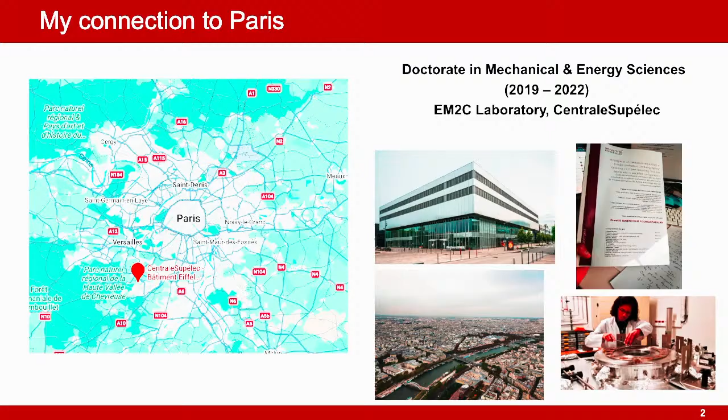Now coming back to thermoacoustic instability—what is a thermoacoustic instability? From the name we can see there is something to do with acoustics, and thermo, so something to do with heat. I'm going to play a video here, which was taken by one of my PhD supervisors, Dr. Daniel Durox.

Let's see if it works. So what you see here is sort of like an organ pipe, but a flame organ pipe. There are tubes of different heights that you can see here, and then there is a very small burner with a tiny flame that we are going to introduce into each of these tubes, and let's see what happens.

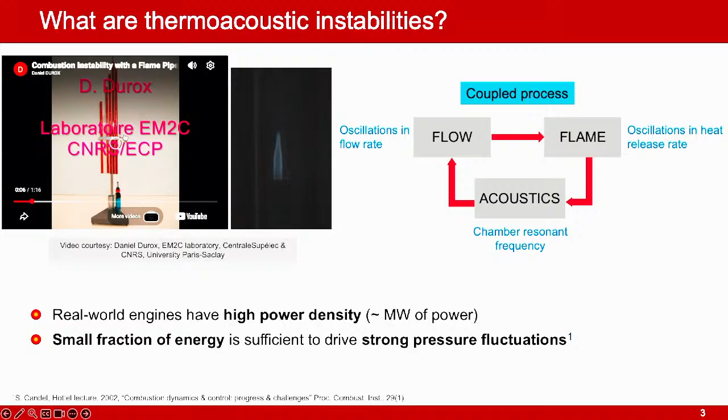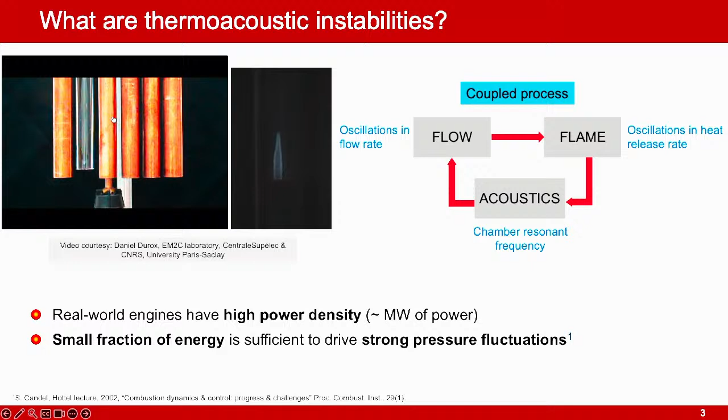So just a small flame in one of the tubes—and then we hear some noise. In the second tube, the frequency is different, the amplitude is also a little different. And then again the frequency changes. So essentially what we see here is as we introduce this flame into tubes of different lengths, you hear a different tonal noise.

Here we have a transparent tube, and we are going to see a bit of a close-up of what actually happens to the flame. This is a slow motion video of what is happening to the flame inside this transparent tube. You can see that the flame is disturbed, and there is some kind of periodic shedding of vortices taking place at the tip of the flame. You see a small blob that is pinching off and then moving downstream. So if we look at what's happening, the flame is being unstable, and this is what we call thermoacoustic instability.

In a combustion process, you have the flow of fuel and air, and that establishes the flame. Any flame that you have produces noise—you can hear it in your gas stove burner or any flame that exists. In engines, what we do is confine the flames, so we put a chamber around it, and the sound waves produced by the flames get reflected back and forth.

At certain conditions, when we match the resonant frequency of the chamber, there is a very strong pressure oscillation going on. When you have pressure oscillation in the chamber, that affects the flow rate of fuel and air. When the flow rate gets affected, the flame gets affected, the sound changes, and this process keeps happening in a loop—this is what we call thermoacoustic instability. So oscillations in flow rate result in oscillations in heat release rate from the flame, and when that matches the chamber resonant frequency, the oscillations blow up.

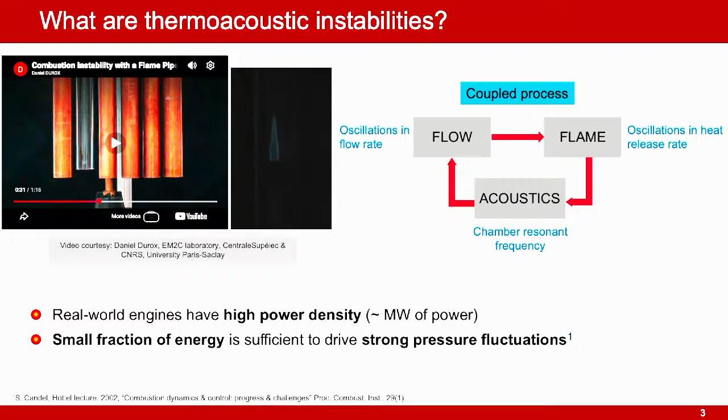So this is a scaled down helicopter engine—there is an annular chamber with multiple flames, and this combustor is undergoing thermoacoustic instabilities. Now let's see what happens.

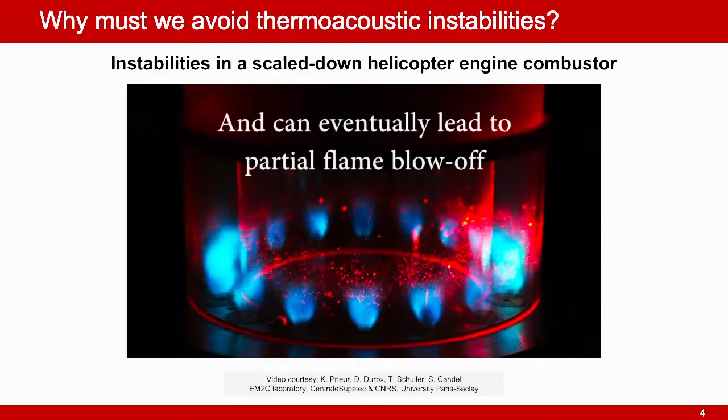So you hear this intense noise, and also sometimes some of the flames blow off, right? The flames don't exist anymore. Now, we don't want this to happen when we are flying at 32,000 feet in an aircraft. We don't want the flames blowing off. So it becomes quite challenging to understand why this happens and how we can prevent it.

Why must we avoid them? Some pictures from actual engines. Here is a new burner assembly that got damaged because of thermoacoustic instabilities. And this picture is quite phenomenal - it's a rocket engine from the 1950s. You can see that the metal chamber actually looks like torn paper.

So it can structurally damage the engines because you have all these sound waves. And when that couples with resonance of some of the structural components, it can blow up these engines. So it can cause noise, as you heard it, and then it can cause blow off, you just saw it, and then it can cause mechanical failure as well.

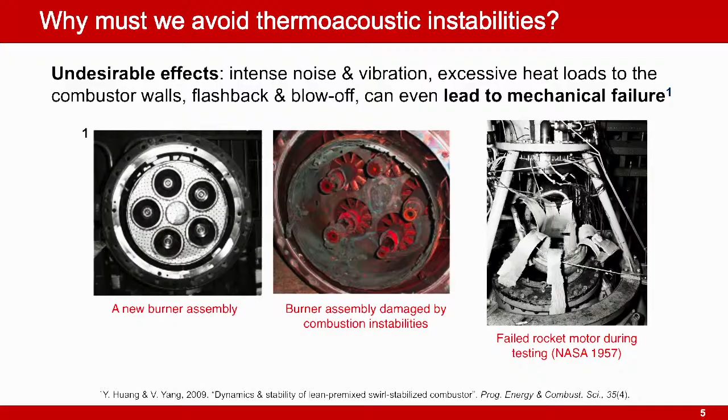So now we are at crossroads with aviation - we need to reduce CO2 emissions. Actually we must reduce CO2 emissions. Either we reduce it or we don't fly, right? So now we are at this crossroad, and some of the options we have is we can either use biofuels in these engines, we can use hydrogen. Of course, there is also the option of using ammonia, but that's again a hydrogen carrier.

So we have all these options, but the problem is when we introduce these new modifications, the thermoacoustic instability in these engines is going to change. So we need to try and understand what happens to this phenomenon when we make any changes to the engine.

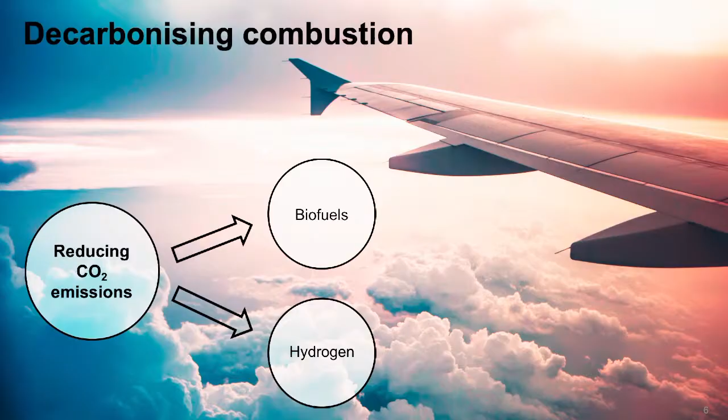First, let's look at biofuels, also called sustainable aviation fuels. These are still hydrocarbon based, so they don't completely eliminate CO2 emissions. But the biofuels are derived from cooking oils, household waste, agricultural waste, and we extract these from plant-based waste. We blend them with traditional jet fuel, and you have the sustainable aviation fuel.

So when you use it in an engine, there is still carbon dioxide emission, but because a major part of the fuel is coming from plants that have already absorbed carbon dioxide, you can have about 70% reduction in the overall emission of carbon dioxide. So the thing about SAF is we don't know what exactly will be the composition of SAF - sustainable aviation fuel.

So there are blends of different components with varying composition. What that means is one part of the fuel can burn faster compared to the other part. So the mixture is just going to have different chemical properties. So the question is, what happens to instabilities when we have a different fuel composition? Currently we only use kerosene in engines, but when we start using sustainable aviation fuels, what essentially happens to thermoacoustic instabilities?

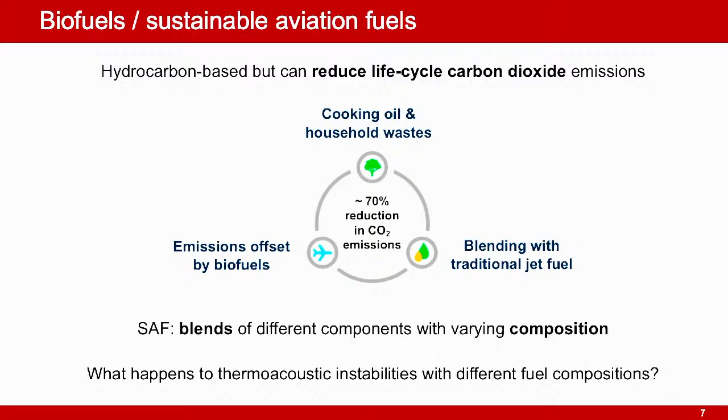So to understand this, we use this lab scale annular combustor. This is a scaled down version of a helicopter engine combustor. It's only the combustor - there is no compressor or turbine, just the combustor, and it has about 16 flames around it. This is at the EM2C laboratory down in Gif-sur-Yvette.

Why do we need an annular combustor? So this is an aircraft engine - this is a cut section of the engine. There is the compressor in the front, turbine at the back, and there is a central shaft connecting the compressor and the turbine. The combustor itself is placed around this shaft, so it takes an annular geometry. If we want to actually understand what's going on in reality, then we need something that closely resembles the actual geometry. Remember, thermoacoustic instabilities involve acoustics, so the actual geometry of the system is quite important.

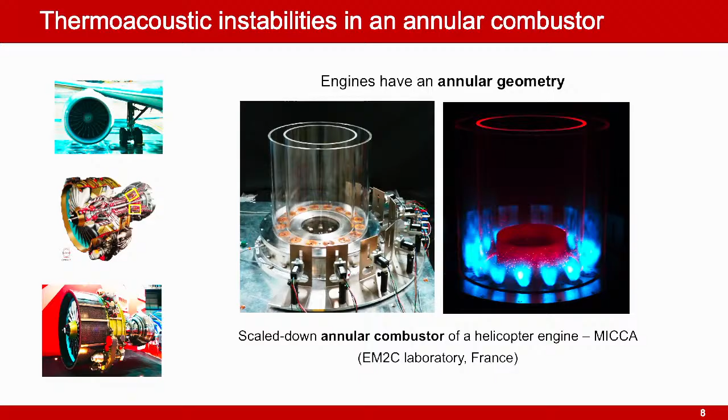Just to quickly tell you the construction, it's actually quite simple. There is this cylindrical section in metal, which is the airflow chamber, so air comes in via this section. Then there is this transparent section downstream, that's the combustion chamber, where the flame exists. And in between the two, there is the cylindrical airflow chamber and cylindrical flame chamber.

In realistic configuration, that is in actual engines, this is not transparent, but in lab scale, we want this to be optically accessible so we can look at what's happening to the flame. And then there are these small sections in brass that you see here, 16 of them, that actually hold the flame. So there is a blown up version of this injector section.

So air comes in from the airflow chamber, it comes to the air distributor. And then there is a swirler. What the swirler does is it gives a rotational motion to the incoming airflow. And then there is the liquid fuel atomizer.

Typically we use liquid fuels, and kerosene is liquid. So there is a liquid fuel atomizer, and what this does is it produces fine droplets of fuel spray. With fine droplets, it can vaporize more easily, and then we want it to mix with air for good combustion to take place. So the swirler, imparting the rotational motion, helps mix the fuel and airflow well.

And then it exits through this terminal plate that has a conical section, and then the flame gets stabilized just downstream of this injector section.

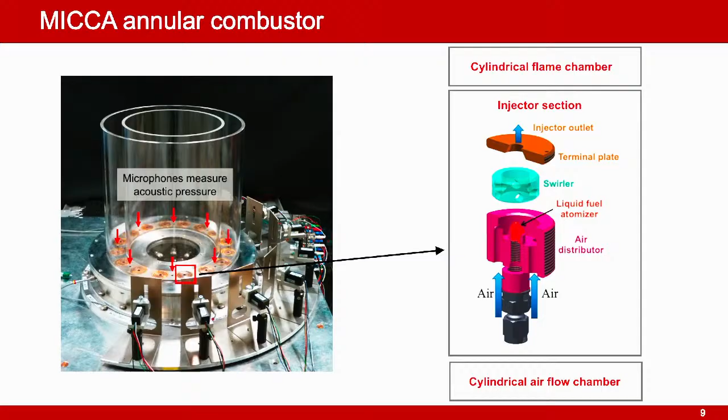So in order to understand what happens to the thermoacoustic instability, we looked at the stability map of this annular combustor at different operating conditions, just like a whole operating envelope of the combustor. We varied the thermal power and the equivalence ratio. When I say equivalence ratio, it's just how much fuel we are using with respect to the air.

And then we consider all these red dots at which we carried out the actual experiment. These are the operating points at which we did the experiments to get the instability in the whole operating map of this combustor. We considered three fuels: a gaseous fuel, propane; a volatile liquid fuel, heptane; and another fuel, dodecane, which is very close in properties to kerosene.

With respect to a gaseous fuel, we don't have to atomize or vaporize it, it is already mixed with the air, so as soon as it enters the combustion chamber, it can burn. With heptane, which is a volatile liquid fuel, we still need to atomize it, so we need to produce very fine droplets of heptane, and there is some extra time required before it burns.

It's called the atomization time delay. But because it's volatile, it's going to vaporize right away, so it doesn't need time for vaporization - as soon as it atomizes, it can burn. Then there is the third fuel, dodecane, which is not volatile, so we'll have to first atomize it, then it vaporizes, and then it burns. So it takes a longer period of time before it burns compared to heptane and propane.

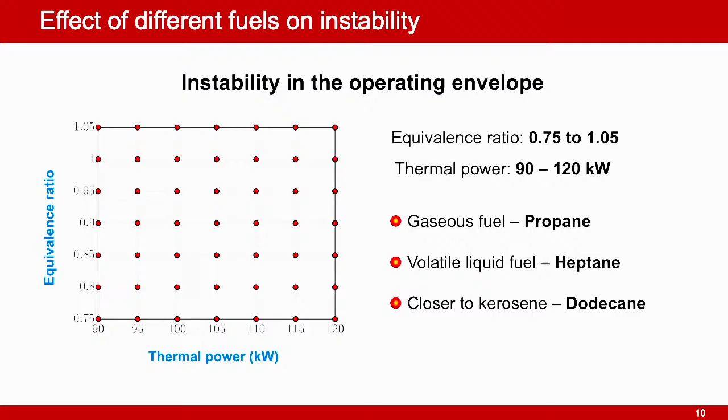So here is the stability map first with propane. As I mentioned, propane is gas, it has the smallest time delay for combustion. The x-axis has thermal power, y-axis has equivalence ratio, and what you see here in the map is the amplitude of instability.

I missed to mention it, but in the annular combustor, we have microphones at different locations that capture the pressure fluctuations in the chamber, measuring the acoustic pressure amplitude. As we go from blue to green to yellow to red, we go up in the amplitude of instability. If it is blue region, the combustor is not undergoing thermoacoustic instability; red is the highest amplitude. With propane, there are very few blue regions, so the combustor is mostly unstable, and in this zone it is really unstable.

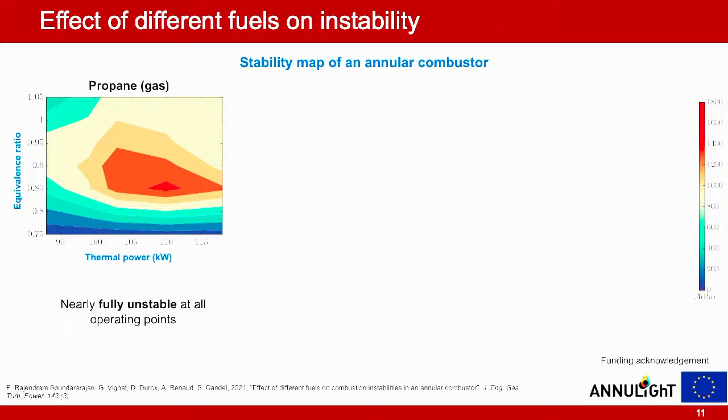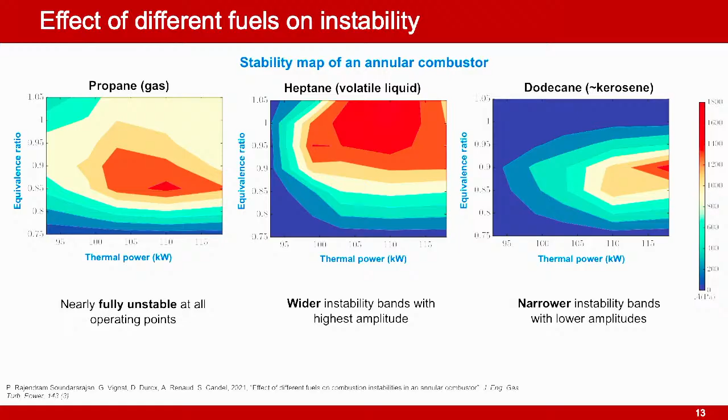And then the third case with dodecane, which is similar to kerosene, where you have a lot of blue regions, so the combustor is stable at a lot more operating conditions. So the question is, what is essentially causing these differences between the three fuels?

In order to study this, we need to look at the flame, because the flame is the source for the thermoacoustic instability to take place. So we want to study the flame, but it's harder to do experiments in the full annular combustor. We still need it to understand what's going on, but it's harder to diagnose. So we took one injector from the annular combustor and made another setup, the single flame configuration. It's just one injection unit of the same dimensions, and we see what happens to the flame with different fuels.

So in order to study that, we have a camera looking at a certain radical emission from the flame. What's special about this excited OH star radical is that it emits at 310 nanometers, which is ultraviolet - we can't see it with our eyes - and it's well known to be the measure of heat release from the flames. Experimentally, we can't measure heat release directly, but the proxy for heat release is OH star emission. That tells us what's happening to the heat release, which is the source term for thermoacoustic instability.

We use an intensified camera with an optical filter that only lets emission around 310 nanometers be captured. We do this and get three different flame shapes with the three fuels. You see yellow and red regions, but these are false colors - the flame doesn't look yellow and red, but again we are capturing in ultraviolet. We just put some color to it in order to properly visualize the flame.

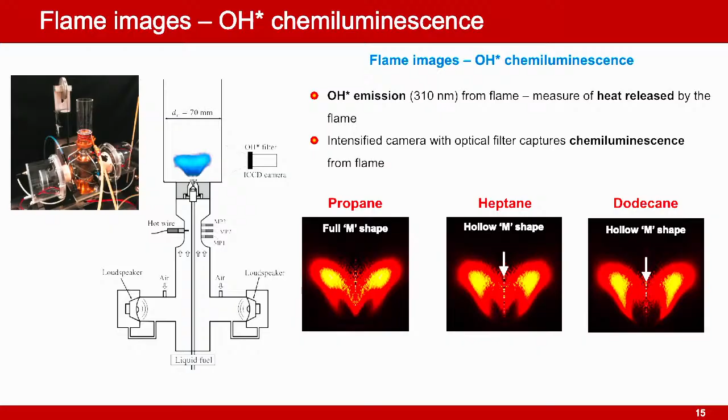In the annular combustor, I told you about this coupling between combustion and acoustics - this is a feedback process. In the single injector combustor, what we tried to do was decouple this feedback loop. But we still want to have the flow oscillations that take place in order to understand what's happening to the flame. So we decouple the feedback loop, and what we do is put some loudspeakers.

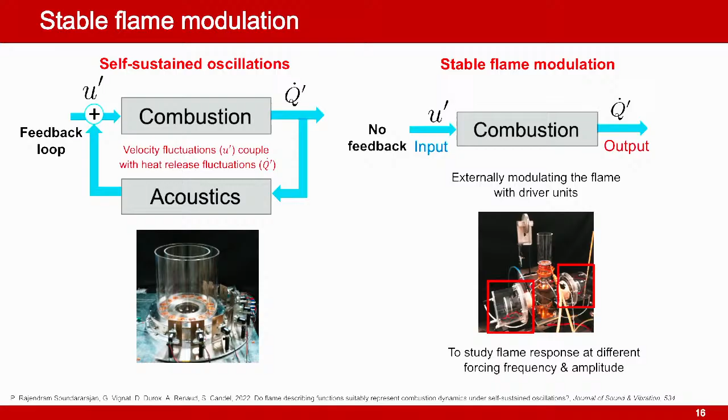These loudspeakers can oscillate the flow, but we have more control over what the loudspeaker does - we can choose the frequency and the amplitude at which it operates. We choose what the loudspeaker does to the flow, and then the flame gets affected correspondingly, and we try to understand what's happening at different acoustic frequency and amplitude. That's the idea of using this single flame configuration - there's no feedback loop here. We externally force the flame to see what is happening.

So when we do this, we can get some sort of transfer function for the flame. When I say transfer function, it's nothing but we give a certain input and then see what's happening to the output. In our case, the input is flow perturbations, denoted by U, the velocity perturbations. The output is Q, the heat release rate perturbations. The transfer function is a linear concept - we can also call it a describing function, which is just a nonlinear extension, but at the base it's just relating input to output.

So F, the flame describing function, relates the output heat release rate fluctuations to the input velocity fluctuations. This is a complex quantity, so it has a gain, which is the amplitude, and a phase phi, which tells us how delayed the process is.

We can use a lot of different experimental techniques to measure heat release rate and velocity fluctuations. For heat release, we can use a camera - we just spoke about the chemiluminescence from the flame. Similarly for velocity, we can use particle image velocimetry or other techniques. These aren't easy, they're quite hard to do in reality, but there are several techniques available.

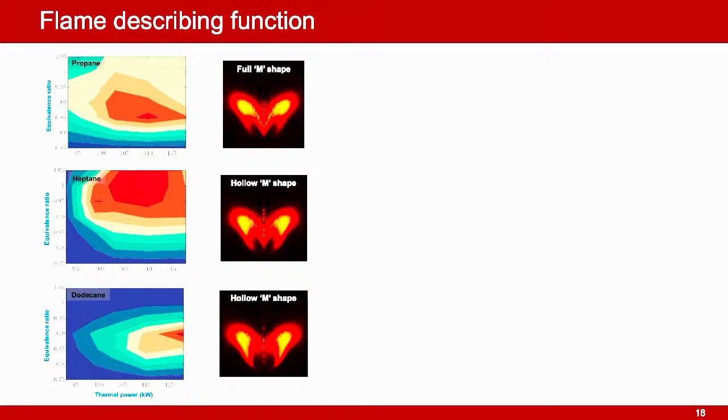So here is the stability map with the three fuels - propane, heptane, and dodecane - that we saw earlier, along with the change in flame shapes that we also saw. Now let's look at the flame describing function. As I said, it's a complex number, so there is a gain and there is a phase.

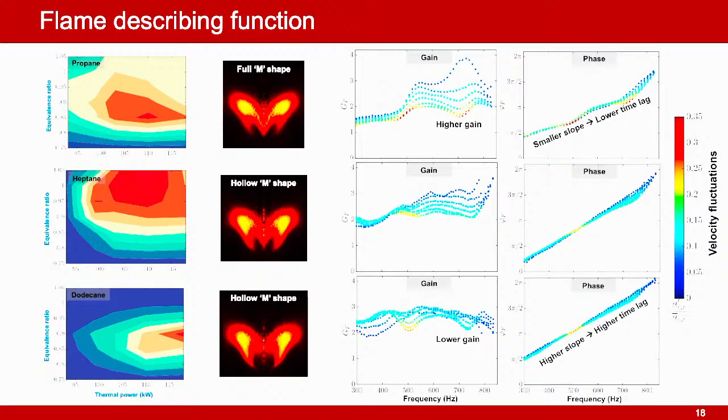Now, we can define a low order model, but I'm going to put it in very simplistic terms. In the 1800s, Lord Rayleigh was the first person to discover this phenomenon, and he proposed a very simple criterion: only when the pressure and heat release fluctuations are in phase, meaning acoustic pressure and heat release are in phase, will the oscillations happen.

If they are out of phase, they are just going to cancel each other, and there is going to be no feedback loop at all. So Rayleigh criterion says in-phase oscillations between pressure and heat release - very straightforward, very logical, nothing too complicated.

Then based on that criterion, we can define some instability bands. Phi is the phase of the flame describing function, and based on this in-phase oscillation criteria, we can define another criteria: if the phase is between pi by 2 and 3 pi by 2, then we will have instability happening. But if it is outside of this limit, there is going to be no instability.

While I say this very simply, we have a complicated equation to arrive at this. We have to write down the acoustic wave equation. Then there is a source term here, which is the flame, which we represent using our complex quantity flame describing function. And then we solve for the dispersion relation. The phase of the FDF will tell us whether the combustor is stable or unstable, and the gain will tell us how much will be the amplitude of instability.

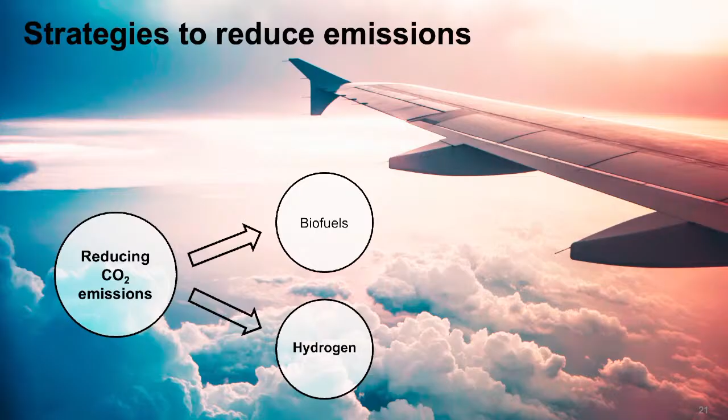Okay, so now we have looked at what happens when we consider a biofuel or something that mimics a biofuel kind of configuration. Now let's go to hydrogen, because hydrogen is a newer fuel. We haven't done a lot of studies with hydrogen. So what's good about hydrogen? There is no carbon in hydrogen, so no carbon dioxide. Of course, there are other pollutants, but at least carbon dioxide is not going to be there.

But the challenge with hydrogen is it's highly reactive. So what that means is, if we mix fuel and air and hydrogen, it can actually sometimes spontaneously burn when the temperature is high enough. So if we pre-mix air and hydrogen, that's going to create a flame in our engine where we don't want it. For example, in the mixing chamber, that's not where we want our flame. We want it in the combustion chamber.

Okay, then let's go non-premixed. What happens if we don't premix? Then what might happen is the air and hydrogen may not mix well, and that can increase the oxides of nitrogen that is produced, which is another pollutant that we don't want. So what we need with hydrogen is a way to quickly mix, like partial mixing, something that's in between the two modes, so we can avoid flashback as well as lower oxides of nitrogen.

Okay, and one potential configuration for that is jet in crossflow. It's a configuration that's used in a lot of other applications, not in combustion, for example, cooling. Essentially, there is a cross flow of air, and then we inject a high velocity hydrogen jet perpendicular to it. So there is air, and then the high velocity hydrogen jet comes and pierces through the airflow, and in the process it mixes. Okay, so that way we can have quick mixing and stabilize a flame.

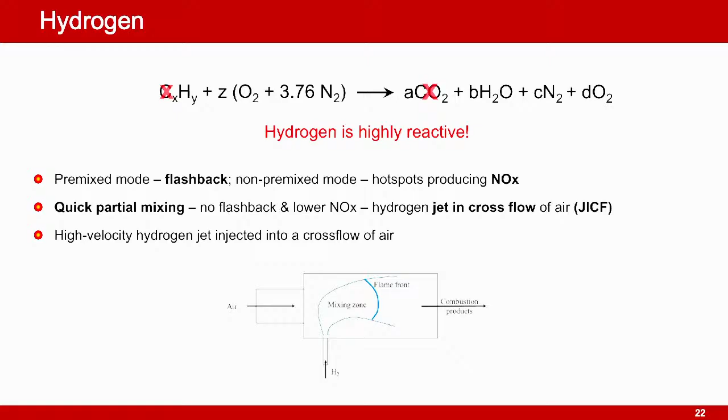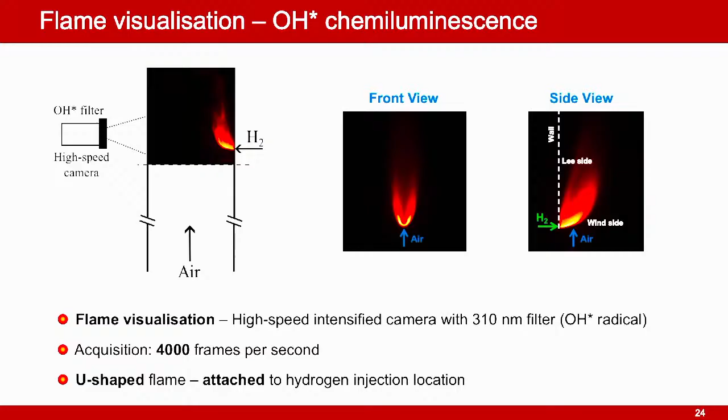And then we can use a smart data analysis technique called proper orthogonal decomposition. You might have heard about it. So it's essentially a way to identify oscillatory modes. Just in simple terms, what we do is we have a high-speed camera, so there is a certain number of pixels, some spatial dimension, and then we have a number of images. In this case, we have 4,000 images per second.

Then what we do is we create a data matrix. We squish the pixels into a single column, and have multiple images in each column. We arrange the data in a certain way, and then do a mathematical operation called singular value decomposition. Essentially that's just pattern extraction.

We are looking for patterns in the flame or in the flow. When we do this, we get the different oscillatory modes. So the first mode, second mode, third mode, and as we increase the mode number, the energy decreases. Let's say there is a 100th mode - it will have very low energy, and essentially that means it's not a physical mode, it's just a mathematical mode. So we need to be careful in only looking at modes that have high energy to make physical sense of what's going on.

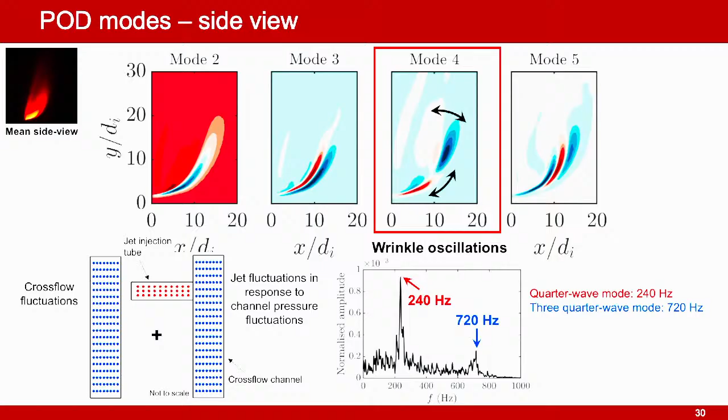We can't see it in the side view because this is out of plane oscillation. So only with the front view will we be able to see this.

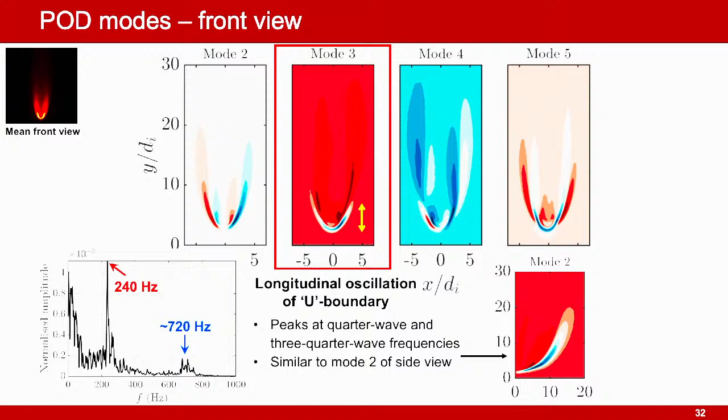The next one is the U going up and down. That's just what we saw here, towards and away from the wall, which manifests as an up and down motion of the flame. This is the staggered pattern we saw before. So we start to see some oscillatory modes with a single flame.

Now let's look at what happens with multiple flames. We have 3 hydrogen jets injected, stabilizing 3 flames. In the front view we see 3 U's. Previously we saw only 1 U-shaped flame, but now because of the 3 injection points, we see 3 flames.

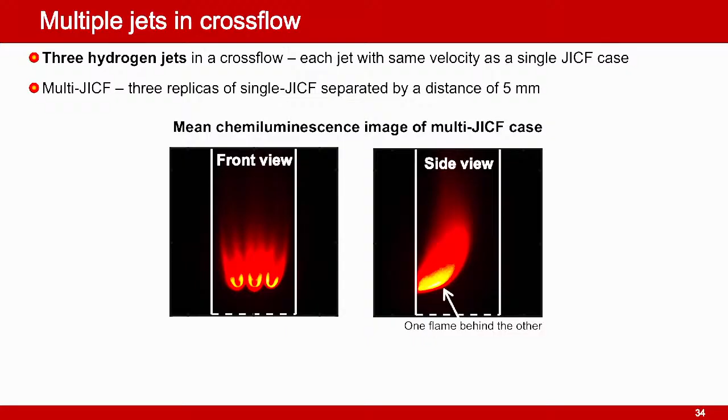The side view shows 1 flame behind the other, so there's no difference - each flame is behind the other. Because the side view looks the same, the modes between the multiple flame case and the single flame case show no difference in the oscillatory patterns. Exactly the same modes that we see. The frequency spectrum also shows the same frequencies.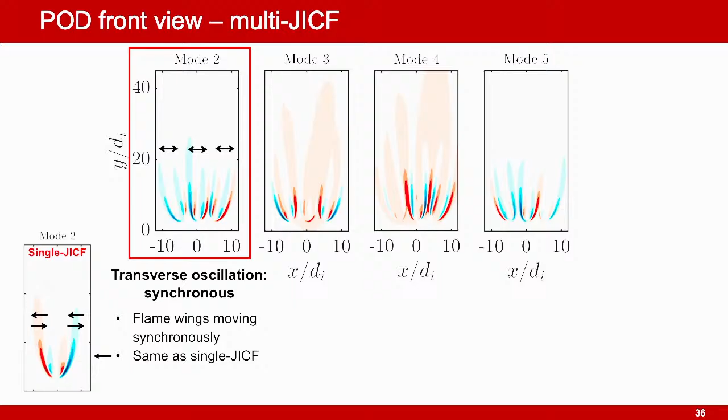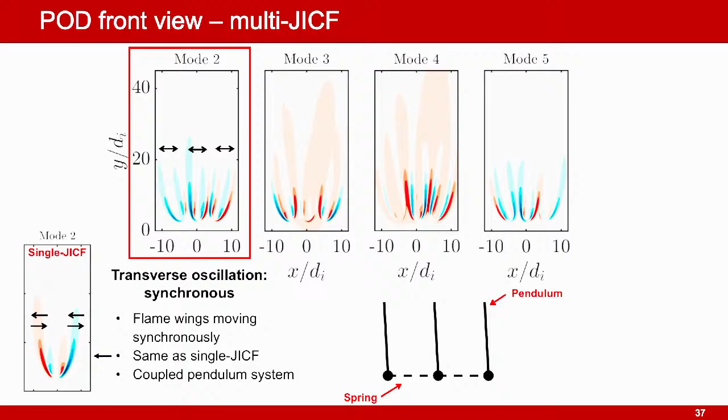This resembles another physical system - think of a coupled pendulum system with 3 pendulums connected by a spring. If we write down the equations and solve the wave equation, the first mode that comes out is a synchronous oscillation, where all 3 masses move in the same direction. So our flames, a completely different physical system, behave like a coupled pendulum system.

Now let's go to the third mode. You don't see a lot of motion of the central flame, but the 2 side flames move, showing alternating red and blue patterns. What's interesting is they don't move synchronously anymore - when there's blue here, there's red here, meaning the flames move oppositely. The central flame stays in place, and the side flames move anti-synchronously. We didn't observe this in the single flame case, which only had synchronous oscillation.

Going back to the coupled pendulum case, when we look at the second mode, the central mass doesn't move, but the 2 side masses move anti-synchronously. This exactly resembles the behavior of a coupled pendulum system.

Another interesting thing is we also see some action going on downstream. Sometimes the flames interact, and then there's a blob of flame because of this interaction that gets convected downstream. This unsteady motion causes another unsteady pocket of flame that forms and is convected downstream. Now imagine we put a turbine here - when this happens, the turbine sees different heat loads, and turbines aren't designed for that. So this anti-synchronous oscillation also produces unstable flame pockets downstream.

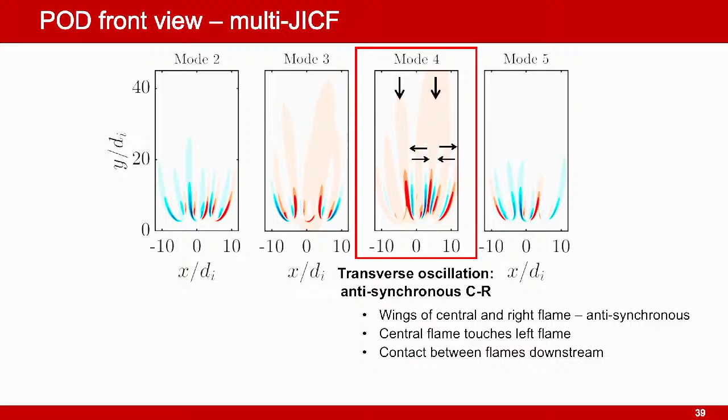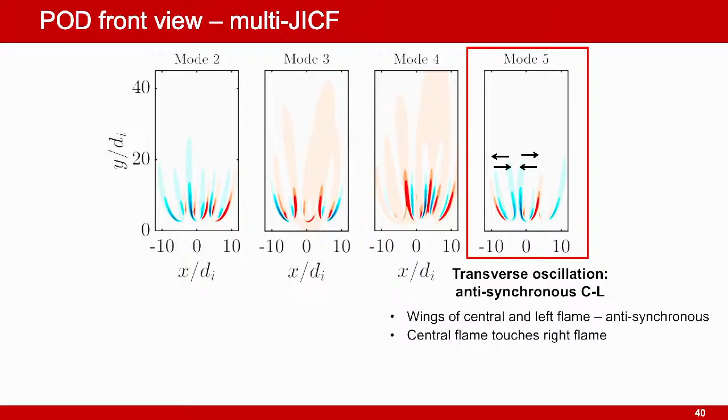Now if you look at the fifth mode, this flame is not moving much, but these two flames are moving, again anti-synchronously. In this case the right flame didn't move, and in the previous case the left flame didn't move - these two combined resemble the third mode for the coupled pendulum system, where the left and right move synchronously, but the central moves anti-synchronously. It's just profound how these flames actually behave like a coupled pendulum system.

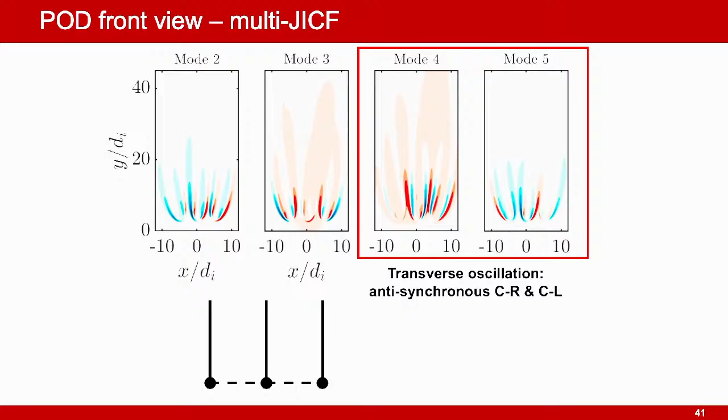So that means this coupled pendulum is already solved for, so we can use the exact equations to understand and predict the instabilities of multiple hydrogen flames. These kind of instabilities have not been previously observed with hydrocarbon flames. Only with hydrogen does this sort of coupled behavior start to show up.

Now we understand that thermoacoustic instabilities are a problem, and we know how to detect them. Now we want to control them. We don't want it in our engines. We can adopt two strategies: a passive strategy and an active strategy.

In a passive strategy, we see that there is instability and then we make some changes to the system. For example, if it's an actual engine and there's an instability, we stop the engine, make some changes, and then see if the instability is present or not. That's the passive approach. In an active approach, as soon as we detect the instability, there is an active change made to the engine to suppress the instability as it's happening. So you don't have to stop the engine, but you have an adaptive way to suppress it. So there are two approaches we can take.

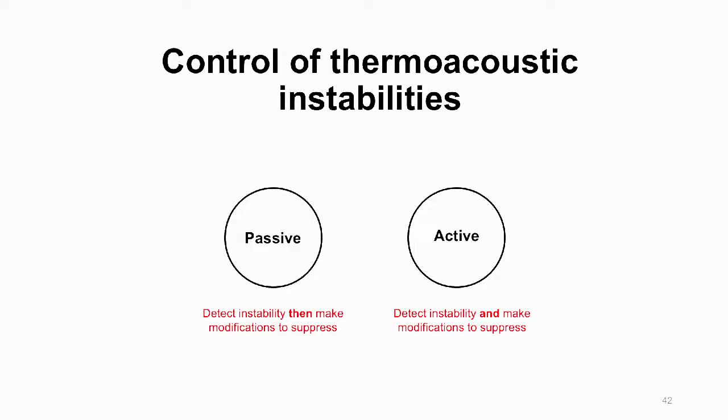I'll give an example of a passive approach we used. There's liquid fuel that is injected, and we can change the way the fuel is injected. Here you see three different spray profiles - a very dense spray, then one with not much at the center, then nothing at the center. When we change these spray profiles, it affects the flame, giving different flame topology, which clearly affects the gain and phase of the flame describing function. This configuration corresponds to a lower gain and a narrow instability range, meaning less possibility of the flame going unstable, compared to this flame which has a very high gain. So this is one way to suppress instabilities in a passive way.

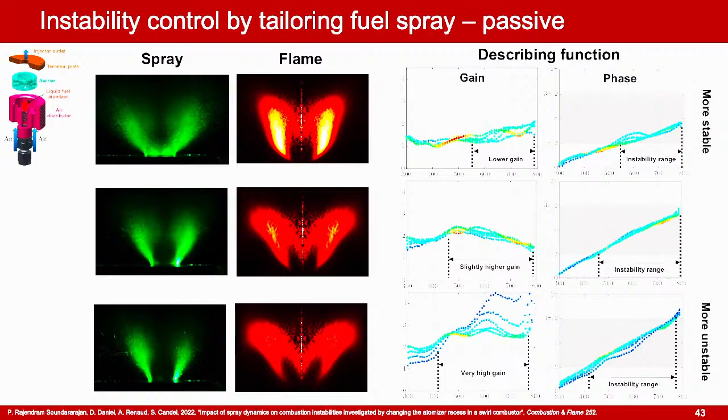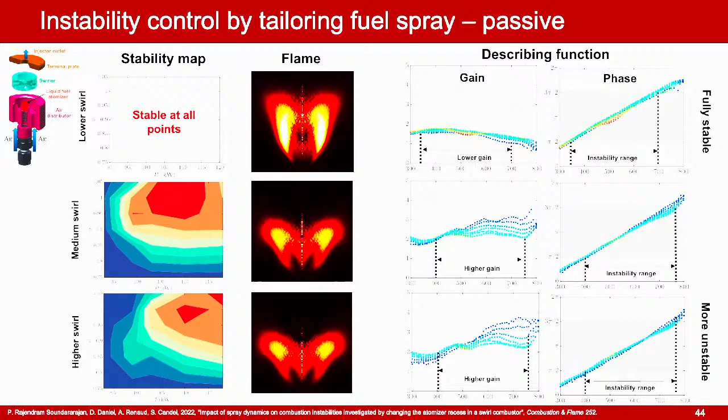Is this a smart approach? As we transition towards decarbonization, we are going to use different fuels. Especially in the current context, we don't want to be geographically reliant upon one part of the world for our fuel. For example, we could have more hydrogen produced in France or the UK, and more agricultural waste available in India, where we could switch to biofuels. But we don't want to keep reinventing our engine - we want the same engine to use different fuels, so we want our engines to be fuel flexible. If they are fuel flexible, then we don't have time for passive control. We can't say let's not operate my aircraft engine for a year while we figure out how to solve instability in India, then go back to the UK and reinvent the wheel to solve instabilities with hydrogen. We don't want to do that. As we progress towards decarbonized engines, active control is the way to go.

So we just break down air or fuel, and that can help in three different ways. It can break down species in air and fuel and produce favorable species that we need for combustion. It can locally increase the temperature of reactants, and can also alter the flow regime. So there are different ways in which plasma can be really helpful.

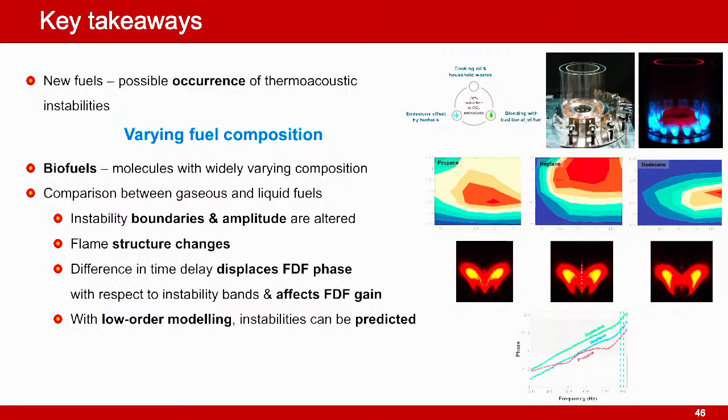And then with hydrogen, we saw that new modes are triggered. With a single jet in crossflow case, on the side view we had some elbow oscillations and then wrinkle oscillations, and in the front view we saw synchronous flame-wing oscillations.

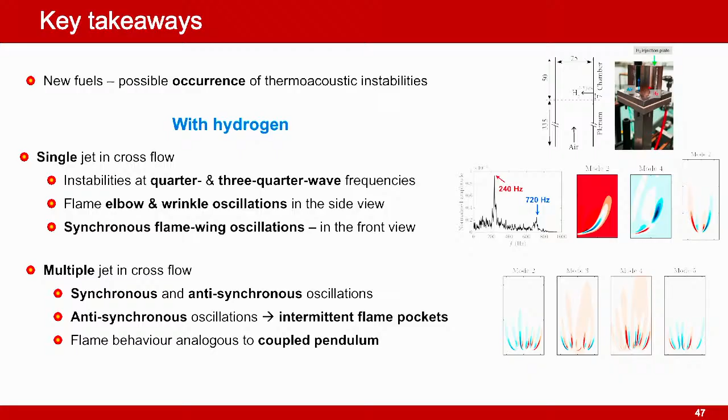But when we moved to a multiple jet in crossflow case with hydrogen, we started seeing new modes. In addition to the synchronous mode, we had anti-synchronous modes, and the anti-synchronous modes produced intermittent flame pockets. But the good thing is they are analogous to a coupled pendulum system, so we can use the coupled pendulum system as a strategy to model these flames.

Then we also looked at control techniques, so we can use passive control. Passive control is detecting the instability and then making the changes. We can modify the liquid fuel spray, we can modify the swirler, which again changes the flame topology, and that way we control the instabilities.

But a smarter way to go about it is using active control, which can help with fuel flexible engines. So that's one way we saw it, using plasmas, and then adapting the flame topology as and when instability happens to suppress it.